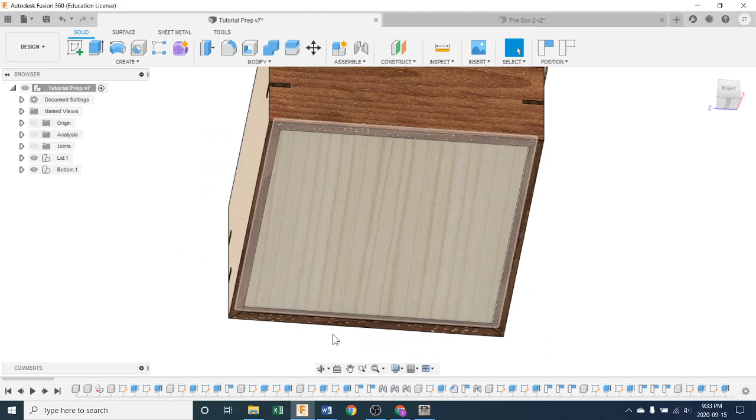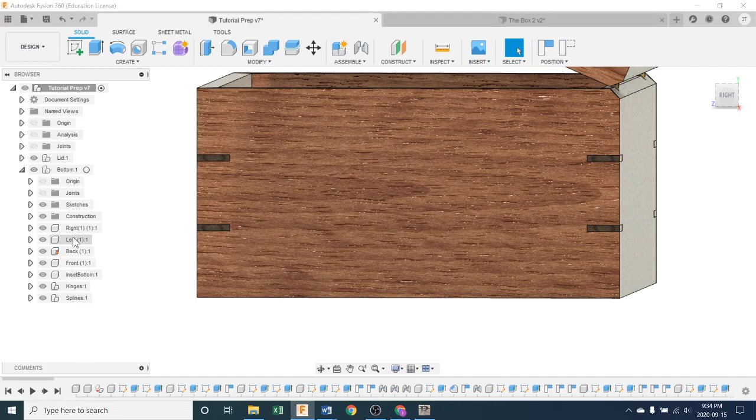So what does that mean? If I head back to our example box here, this bottom has a slotted inset into the sides. If I want to make that pretty clear, I can do that a couple ways. We can turn on the analysis, and you can see it this way. There it is. And the slot we're actually going to try and create, if I turn the analysis off and go to bottom and pick any one of the sides, I'll just pick the front here and go isolate. You can see just that side, which is the front side, and you can see the slot we're going to try and make in it right here.

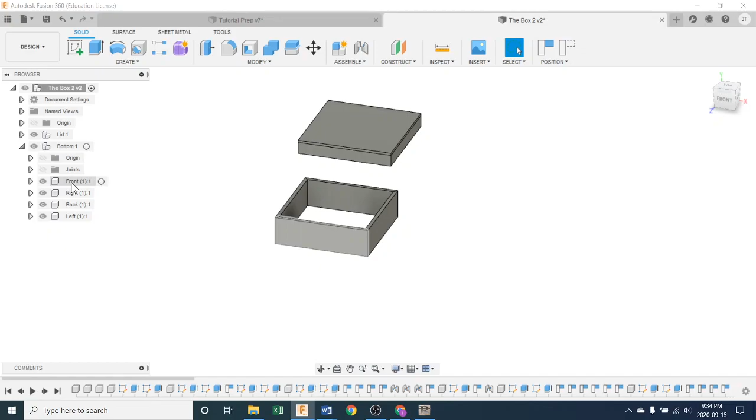So let's head back to ours and figure out how to do that. The first thing you want to do is head to bottom, expand it out, maybe isolate the side we're looking for by right-clicking on it and choosing isolate. So there's the side I'm looking for. And make that component active so we can draw on it.

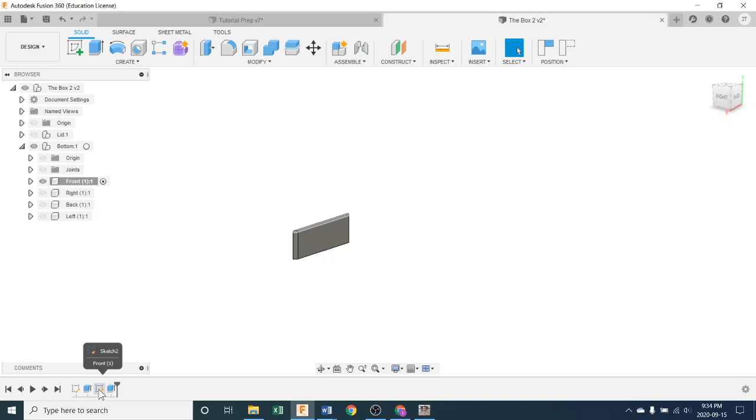Active. Now you see all the steps it took to make the component. First we drew the rectangle, then we extruded the rectangle, then we drew for the miters, and then we extruded through and cut the miters.

So on this side, we can get a bit closer, on this side we're going to create a sketch. We're not sketching on a plane this time, we're actually going to create a sketch, and we're going to choose this face and sketch there. And push capture position always if it's presented. Okay, so I'm drawing on that face.

Imagine a piece of paper that I've laid on top of that, or maybe just a pencil right on top of that face. So now what we're going to do is we're going to draw a 2-point rectangle. That's this one. And we're going to use it as a bit of a height gauge. So I'm going to draw it connecting to this corner.

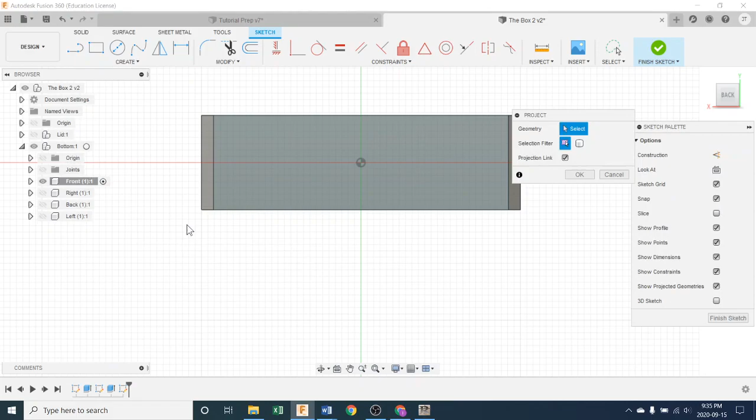Uh-oh, it won't connect to this corner. I'm looking for a snap like this. See the blue box? I want to connect to that one, but of course it's not part of the shape that I picked, so I need to project it up. So we'll head up to create, we'll go to project again, we'll project this point right here, and maybe this line over here. That might help us like that.

Push OK. Now we're going to use our rectangle tool to draw a rectangle. Oh, it's snapping there now. And then we're going to head over to this line. You'll see it snaps there now because it's at 10. And the height we want is 3/16 of an inch. So, 3/16 for the height. Enter. There it is. Now, all I'm using that for is a gauge.

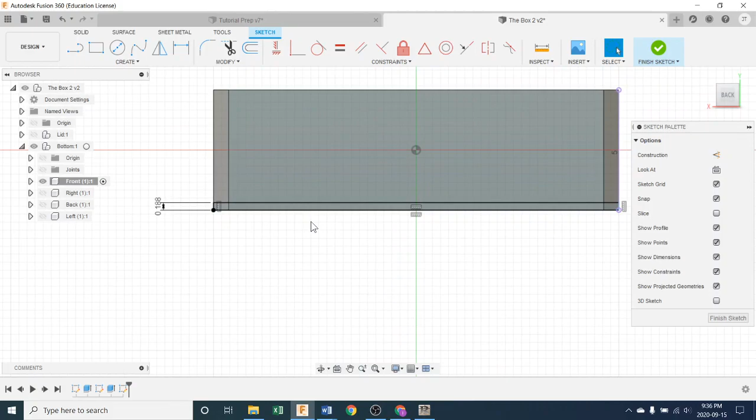I would like my bottom to start 3/16 up from the lower edge of the box. So what I'm going to now do is go again. I'm going to take my rectangle tool, 2-point. I'm going to go from this corner now, right down here. See it snapping? Boom, got a nice box. The blue box says I'm snapped.

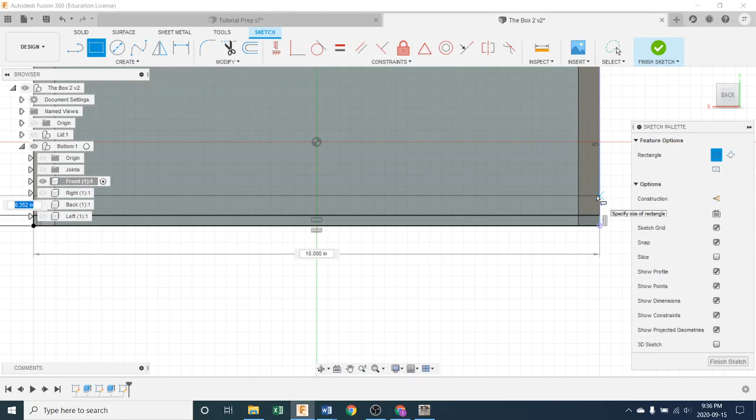And I'm going to go over to this end. Again, it's 10 inches wide. And maybe I'll zoom out a little bit so you can see this a little better. It's 10 inches wide, and I'm going to make this 3/16 up. So 3/16 in the vertical.

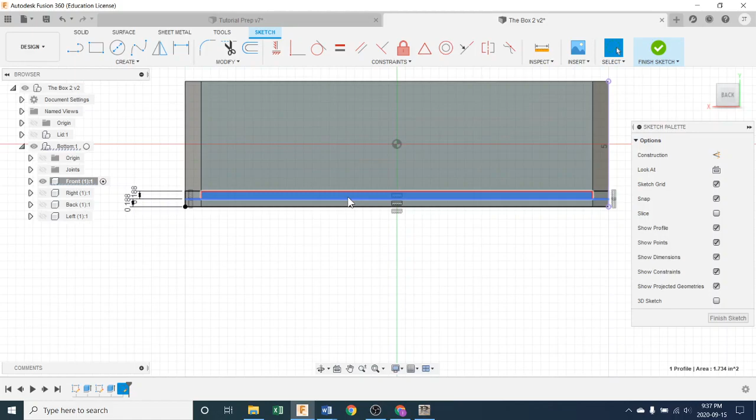There we go. So the bottom one I'm going to basically ignore, and I'm going to extrude this one, but I'd like it to go all the way, so I have to hold shift and pick this one, and then I have to hold shift and pick that one. Now I've got the whole thing ready for extrusion. I'm going to rotate a little bit, and you can see what's going to happen when I push E.

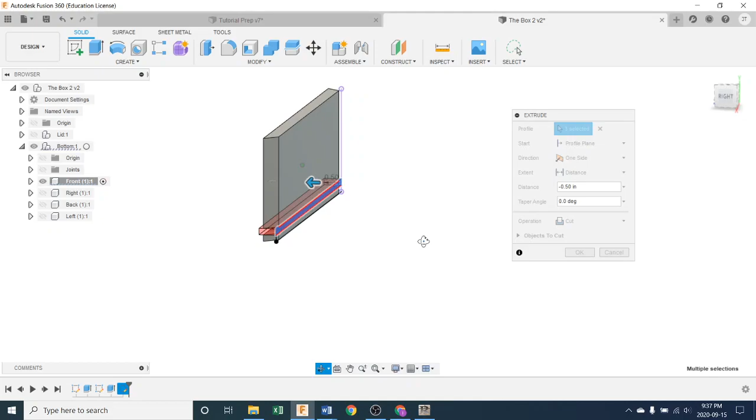I'm going to go this way, and I'm going to cut, but I'm not going to cut all the way through. I'm going to cut in half of the 3/8 distance. Remember we made this 3/8 of an inch across, 10 millimeters if you were working in millimeters. So I'm going to go halfway. So what's a good way to say that?

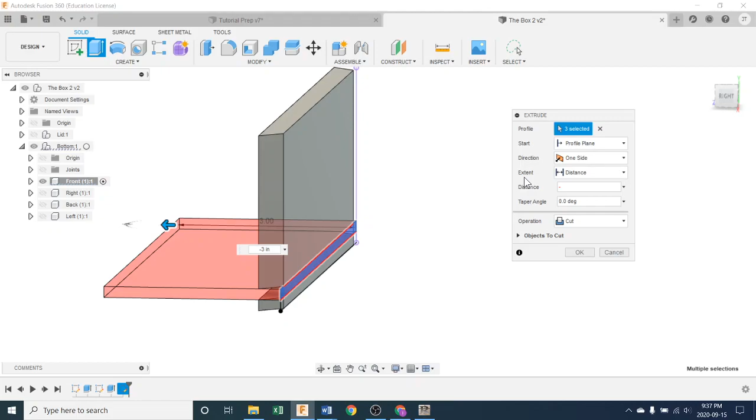Well, it says it's minus half an inch right now, so that's why it's going all the way through. But let's go negative direction, 3/8. Well, what's half of 3/8? Who knows? Let's go back. I got to hit my backspace here. There we go. Half of 3/8 is 3/16. To halve a fraction, just double the bottom number. It's pretty simple.

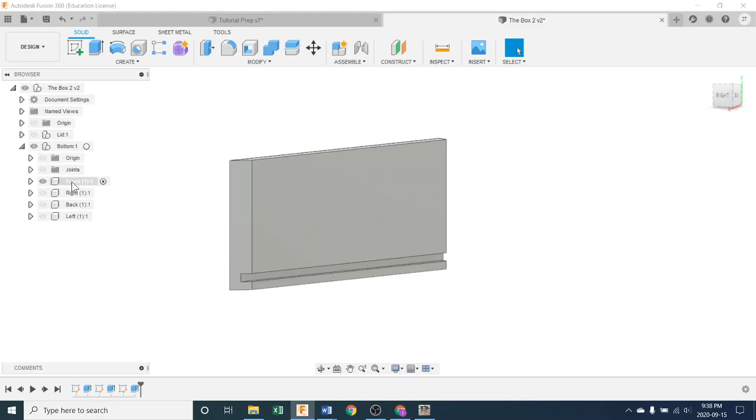Okay, so there we have it. We have a slotted side. Now what should you do to get the other side slotted? All you need to do is unisolate the front. There it is. Isolate the next one. I can't really see the next one because it's ghosty, because it's not active, so I make it active.

And then I go and make a drawing just like I did on its side that has, well, the same side we did before to make the slot, the inside of the box, which you'll know because you can identify it from the miters. And then do that to the right, back, and left, and you will have all the slots you need. That's it. Good luck.